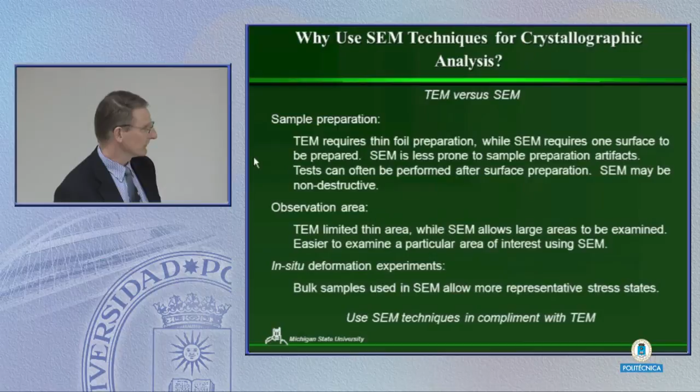With a bulk sample in SEM, we have a very good idea of what the bulk state of stress is, and we can relate that more directly with what's going on in the material. So hopefully we'll see some of those things as we go on. But on the other hand, SEM is not going to solve all the problems. We do have to use it in complement to TEM, and sometimes we're just stuck having to do TEM.

So when I talk about these sort of techniques, some of these will be familiar to you, and I think some will be new. Electron backscatter diffraction patterns have become very common in the last 20 years. We use them very extensively. When I started doing them, it would take 30 minutes to determine one orientation. Now with fully automated systems, we can get 500 orientations a second. So you can just get extreme amounts of data very quickly using it.

It's very useful for orientation determination. Has significant but not perfect applications in phase identification. What we focus on, and I'll talk a lot about today for some different reasons, are electron channeling patterns, and they've been around for a very long time. And sort of a subset of those are selected area channeling patterns. They allow us to determine the orientation perhaps more accurately or in a different configuration than you do with electron backscatter diffraction. They can also be used for phase identification, but we're not going to be doing that.

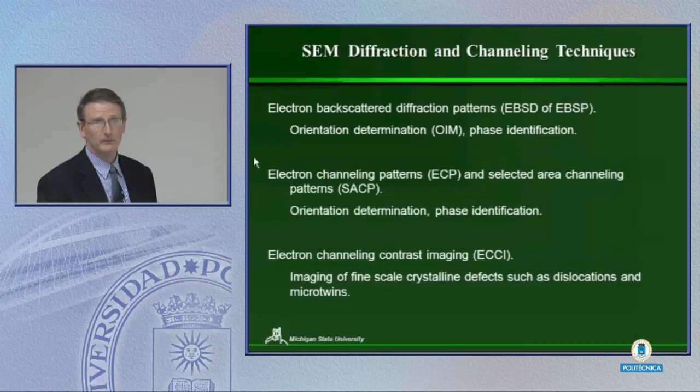And then really the thing that is somewhat unique is this idea of electron channeling contrast imaging, the idea that we can image fine-scale defects such as dislocations and microtwins in SEM, something that a lot of people haven't thought about doing in the past.

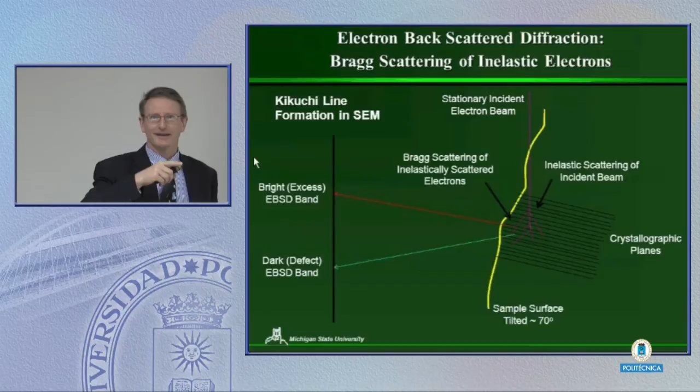So very briefly, can we see that well enough? That's pretty dark, and I apologize. I don't know if it helps if we turn off the lights in the room. Will that hurt you? Oh, we can't do that. That's... Okay. Yeah, there are actually very few dark lines on these slides, so hopefully we'll be okay.

Whoops, sorry. So the idea with electron backscatter diffraction is we have a sample tilted to a fairly large angle. We have an incident stationary electron beam. We get inelastic scattering in the sample. And those inelastically scattered electrons diffract to form Kikuchi lines that we detect on some sort of a screen.

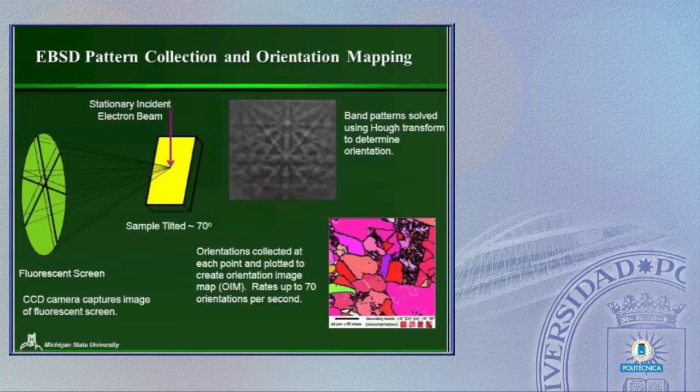And so the idea is you have a sample, again, that's tilted. We focus the spot on a given area. We collect these on a fluorescent screen, which then is recorded with the CCD camera. And we get patterns like this, which we can then use a Hough transform to determine the orientation. And so we can do maps like this, and actually this is not accurate now. This is a few years old. This is rates up to 70 orientations per second. This is more like about 500 orientations per second if everything is now working correctly.

But more what I'm going to focus on is this idea of electron channeling. With electron channeling, what we have is a situation that simply, as the electron beam orientation changes, or if the electron beam orientation remains the same but the crystal orientation changes, the backscattered intensity is going to change. And so there's a number of different ways that can be used to give us information about our sample.

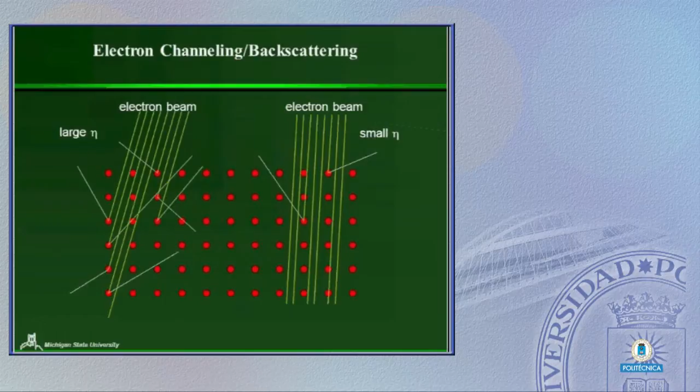If we take a single crystal of silicon, so now the orientation remains the same, but we look at that at very low magnification, the orientation of the beam changes as we image a sample, and that's effectively what happens in an SEM at very low magnification. We get a beam raster where the beam orientation changes. We'll get a series of lines that is indicative of the crystallography of the sample.

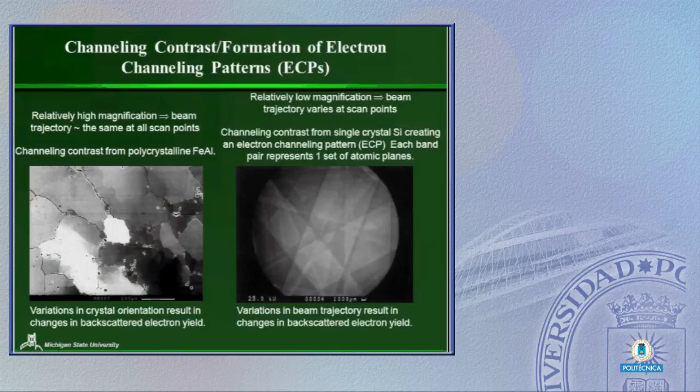And each one of these bands here is going to represent a set of crystallographic planes in the sample. So from this, we could determine the orientation of the sample. But in this format, this is not very useful for us because we're really limited to using this on very

And we typically don't use these necessarily for trying to just in general find orientations, but we want to be able to use these in the way you would use a selected area diffraction pattern in TEM in order for us to set up specific imaging conditions. And so that's quite useful for us.

There are some problems with this. Just in terms of the general sense of a scanning electron microscope, what you can do with this. First of all, a lot of SEMs are incapable of doing this. They used to be offered as a fairly standard option on SEMs, but it is much less common these days because EBSD has become so widely used.

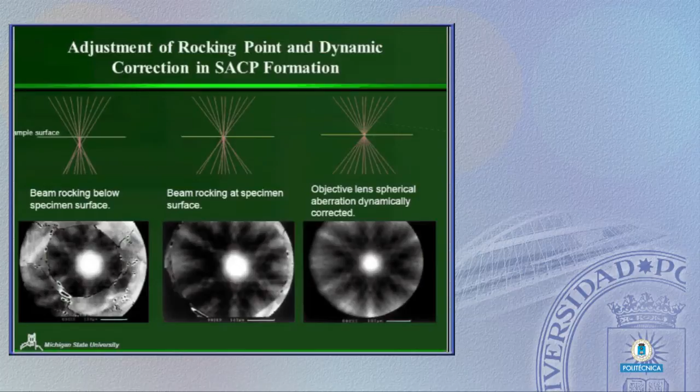Okay. So to compare those a little bit more, EBSD has spatial resolution certainly less than 1 micron. Some people will say tens of nanometers. It really all depends on how you're defining your backscattered electron interaction volume and how that is as a function of direction in your tilted sample. It has a fairly complex interaction volume.

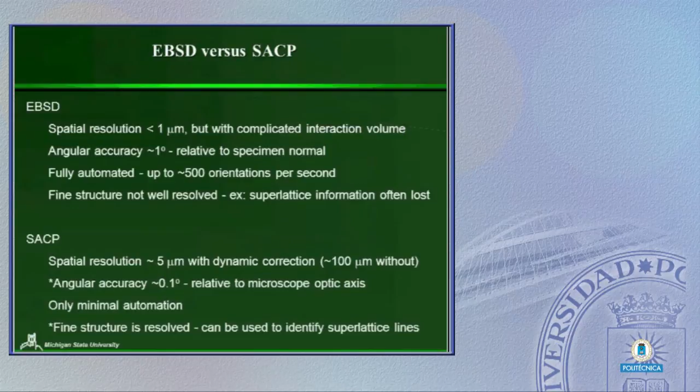With selected area channeling patterns, the best we can do is maybe about 5 microns. So the spatial resolution is not nearly as good. If we don't have dynamic correction, it's going to be even worse, about 100 microns, which really starts limiting this approach. But the angular accuracy relative to the optic axis is quite high, about 1/10 of a degree, maybe a little bit better. Only minimum automation, which my students don't like because it makes them work hard. And we do get fine structure resolved, which I'll give an example of, how that can be very useful for us.

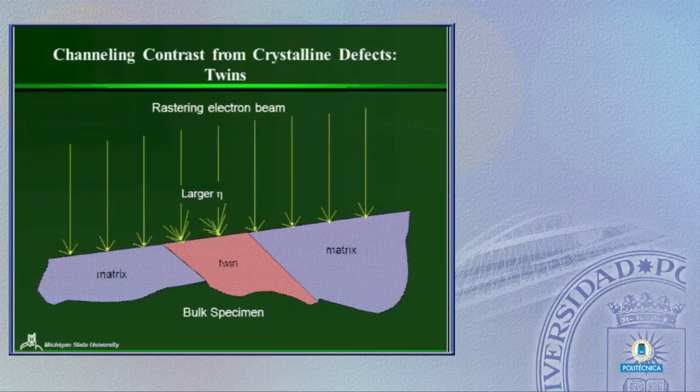So if we look at the sorts of things we can do, if we could see contrast from different orientations in a polycrystal, we could certainly see contrast from different orientations associated with twins. As we move across a twin, when the orientation changes, we're going to get a change in that backscattered yield, which is going to reveal the twin. And we can actually do that with pretty good resolution.

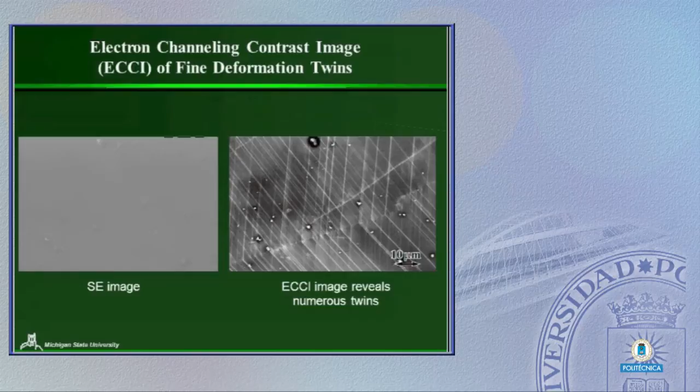This is a secondary electron image of deformed TiAl, and this shows a twin boundary, an annealing twin boundary, and these fine lines are deformation twins. Those are very, very small, in some cases on the order of tens to maybe hundreds of nanometers across, so they're very fine twins that we can resolve very easily in the SEM if we set up our imaging conditions correctly.

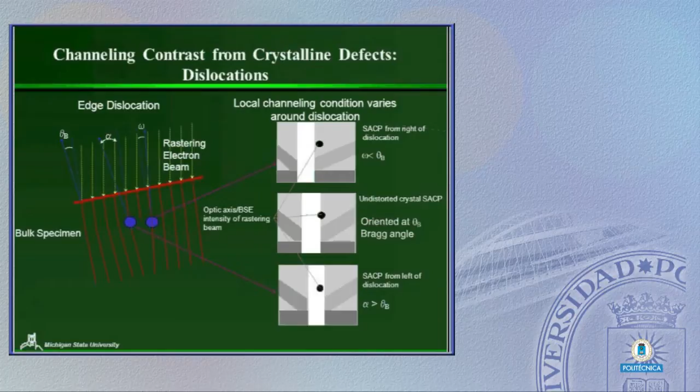If we want to see a dislocation, imagine this as a dislocation here. As we raster the beam across the sample, locally the orientation is going to change. We can imagine the channeling pattern near that dislocation; we can't measure that, but the center of those channeling patterns will represent the local backscattered yield, given by the intensity on that pattern at that given orientation. And because the pattern shifts as we move across the sample, we get changes in intensity as the beam moves across that dislocation line.

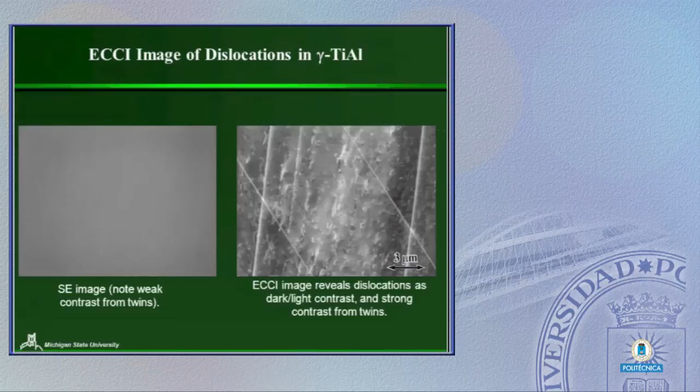Here's a secondary electron image of a very flat polished surface. But when we image it under the right channeling conditions, with the orientation set up properly, we can see the dislocations in the substructure fairly clearly. Here's a deformation twin, and you can see it peters out here. These dislocations right through here are the dislocations at the leading edge of that twin. So we can resolve them reasonably well, maybe not as good as TEM, but not bad.

Now this is kind of a noisy image, but people look at these things and say the dislocations look a little bit different than they do in TEM. Well, you might expect them to, because we have a bulk sample, and we're only really looking at the dislocations that are close to the surface.

In fact, theoretical work was done in Peter Hirsch's group many years ago on this, and shows that if we take the trace across a dislocation line, as you go deeper into the sample, the peak-to-background intensity is going to decrease. So the dislocations are going to be sharp where they exit the surface, and as they go deeper, they become noisier and eventually disappear. At first people say that's inconvenient, but the reality is that's a really good thing.

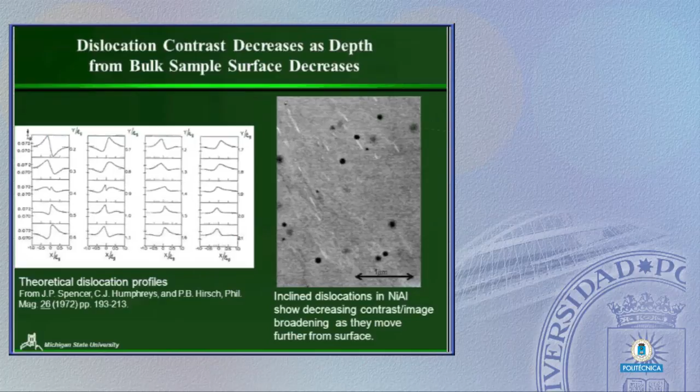Because if we were seeing all the dislocations through the depth of a bulk sample, we wouldn't be able to see anything. They would completely overlap and make it difficult to see. So this is a useful thing for us, but it also means that it's going to be a little bit more difficult for us to interpret the dislocations relative to how we're used to seeing them in TEM.

Well, how do we do this? Well, it's a fairly straightforward situation. We use a field emission gun SEM. We use a typical backscattered electron detector, pole piece mounted. On some of our microscopes, we've gone to retractable detectors because we want to be able to get it out of the way at times.

What we do, and I'll discuss a little bit more, is we generally use the specimen pretty much perpendicular to the incoming electron beam. We can tilt it about plus or minus 30 degrees and still be able to use this fairly usefully. But this is a different configuration than a couple of other people use. The field emission gun, because it's a thermal gun, gives us a pretty good beam current, and that's been a big advantage to us. We have a beam divergence of about 8 milliradians.

We work at typical SEM kind of working distances, and that makes our life really nice, because what we're able to do is use various deformation stages, things like that, that would be much more difficult to do if we were in a high tilt configuration, and quite frankly, impossible to do if we were doing this in a TEM.

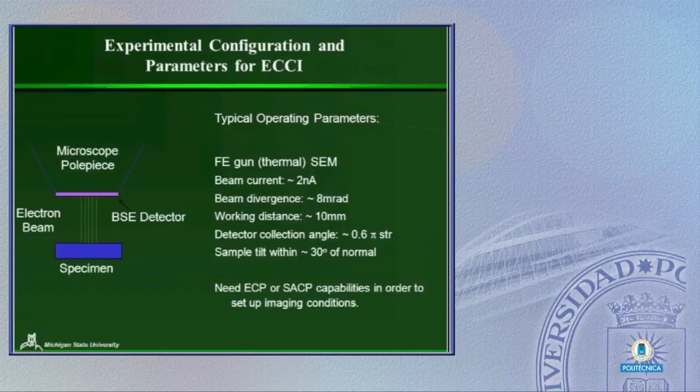This typical backscatter detector with these working distances gives us a fairly large detector collection angle, which is very useful for us because it gives us a lot more electrons on the detector, which really makes life easy. And one of the critical things for us is generally you're going to need to be able to collect these channeling patterns in order to set up the proper imaging conditions.

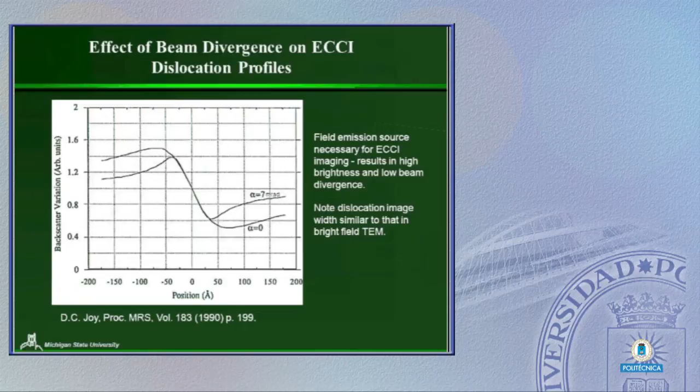The other thing worth noting on here, if you look at these sort of peak to background positions, the widths of the dislocation lines are similar to what you'd see in bright field TEM imaging. That's about as good as we're going to do. We can't set up anything like a weak beam condition like you get in a typical TEM, because here we're really limited by the probe size in terms of our resolution, rather than some of the other things associated with weak beam microscopy.

How do we set this up? Well, in many ways, this is the same thing as you would do in a TEM. In TEM, you would go to diffraction mode, you would tilt your sample to a 2-beam condition, you'd adjust your deviation parameter by moving your Kikuchi lines relative to the positions of your diffracted beams, and then you'd switch back to imaging mode.

Well, what we do here is we go to diffraction mode, we tilt to a 2-beam condition, we increase the magnification of that pattern, and we put the center of our pattern right on the edge of one of these channeling bands. And the reason we do that is this is where we get the most dramatic change in contrast between the dislocations, bending the planes, and the background. And then we just switch back to typical imaging mode. So here we're rocking the beam, and then here we're just rastering the beam back and forth across the sample. So in many ways, we can envision it a lot like what we do in diffraction contrast TEM.

One thing that's a little bit different, and those of you who are familiar with TEM realize that kinematical and dynamical theory both tell us that we want to use a deviation from the exact Bragg condition, and the dynamical theory says we have to do that with a positive deviation from the exact Bragg condition. It turns out with this, we actually want to set up our channeling condition exactly at the Bragg condition.

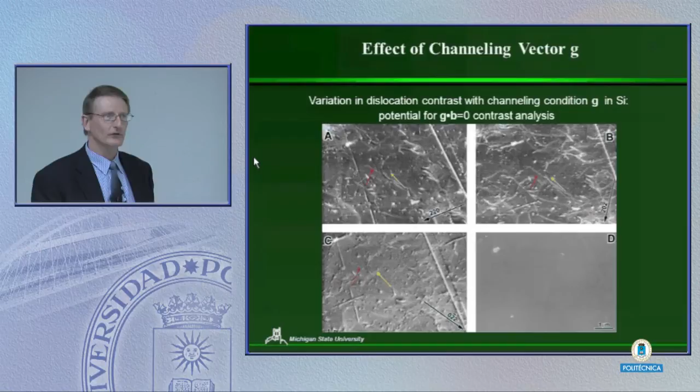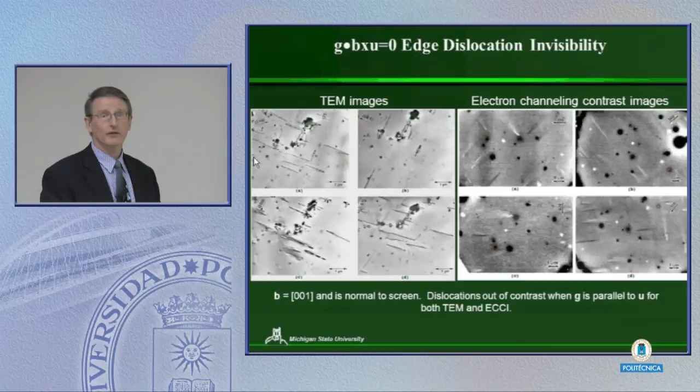And so that means that if we're very careful, and it's very tedious work, I'll be honest, my students don't like doing it, but we can determine things like Burgers vectors, and we can certainly determine things like line directions through trace analysis, rather than having to make a TEM foil to do those things. And again, sometimes that's a valuable thing to do.

I want to take a second to talk about how we do our sort of approach versus other people. A lot of people actually do this at a fairly high tilt configuration. And the reason is your backscattered yield increases as your tilt increases. And so typically EBSD is done at large angles, and that's the reason for doing them at large angles. That, and also you can fit a camera on the side of the chamber, and you can't put a camera right on top of the pole piece of your microscope. And so that certainly is an advantage because you'll get more signal at higher tilts.

But there's some disadvantages to that. First of all, if you're at high tilts, what tends to happen is your image gets squished together in one direction, and you have to focus differently as you raster across your sample. You can certainly do some corrections in a microscope to take care of some of those things, but it isn't necessarily an easy thing to do.

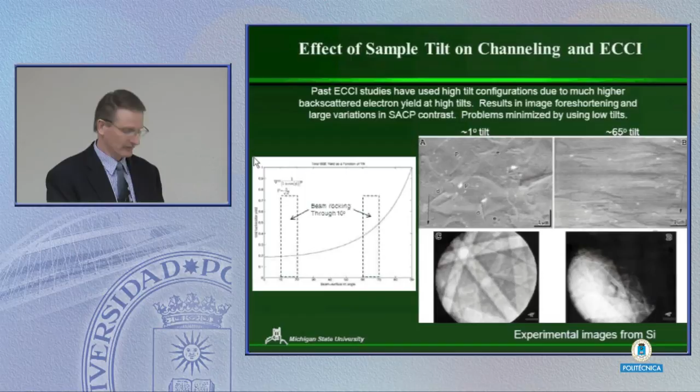The third thing is, if we have our sample tilted way over, it becomes much more difficult for us, for example, to use our in-situ deformation stages. They start knocking up against the pole piece of our microscope and things like that. So just working at a low tilt makes life a lot easier in a microscope. And so that's why we prefer to do it that way.

And so given that, this technique, electron channeling contrast imaging, is really very well suited for particularly in situ experiments. Now I'll show you some things from both in situ and ex situ experiments. The sort of thing that we can do is we can do both in situ or ex situ 4-point bending. The advantage here with 4-point bending is we can look at the tensile surface of the sample where the maximum stress is. And that really helps us work our way through some things.

We can also look at the sides of 4-point bend specimens in situ, and I'll show you some examples of this. And this is quite useful for us to get a general feel for how a crack is propagating. And finally, we can actually do some fairly high cycle fatigue in bending too, which again allows us to look, for example, at the tensile surface in a fatigue sample.

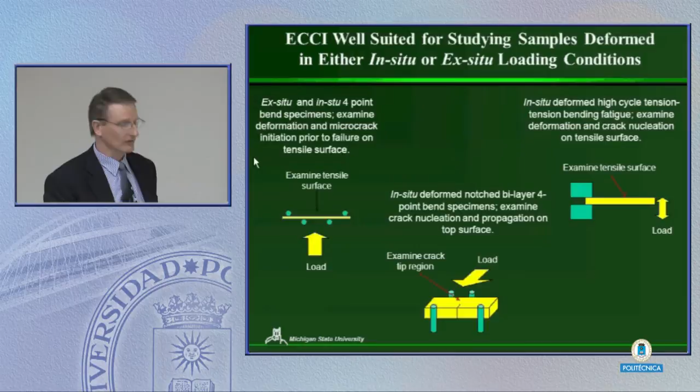We have a stage that will go at about 500 cycles per minute on our microscope. Obviously, we have to stop it to actually image, but we can do some fatigue testing, and then we can look at it, and we do some more fatigue testing and look at it, which is a useful thing for us. So what I'd like to do is now just go through a few examples of the sorts of things that we can do with this.

The first thing I want to show you is how we can look at crack tips. And this happens to be a nickel aluminum, which 20 years ago was a very exciting thing for people to look at. And we've been looking at this a little bit more and more over the years. What we've done is we deformed these with 4-point bending. In this particular case, I won't go into a lot of details, but I want to show you really the capabilities of the technique.

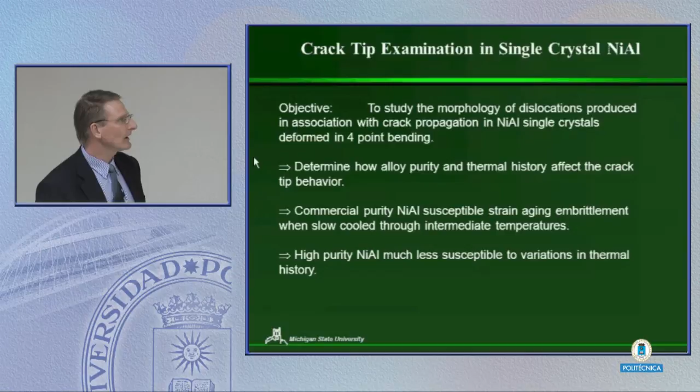We can determine how alloy purity and thermal history are affecting the crack tip behavior and the crack propagation. The reason we're looking at this is commercial purity nickel aluminum is susceptible to strain aging embrittlement. It becomes essentially a zero fracture toughness material if it is cooled the wrong way. High purity nickel aluminum is much less susceptible to these variations in thermal history.

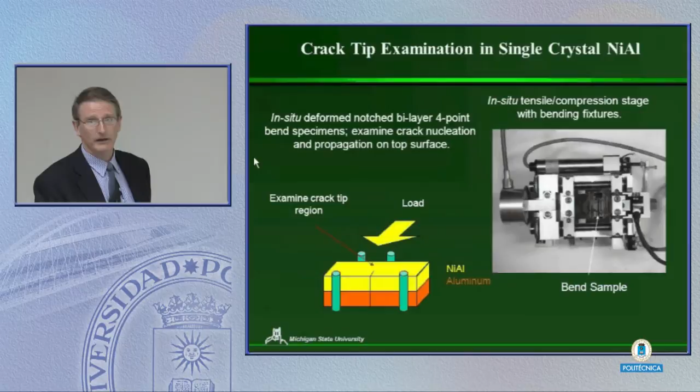And so what we're doing is we're taking a sample like this. The nickel aluminum still is very brittle, so we actually bond it to an aluminum substrate, really just to increase the toughness a little bit. And we take the sample and we put it in our deformation stage here, and you can see it right there, maybe, okay? And all we're doing then is we're deforming this, and we're looking at how the crack propagates out of this notch here.

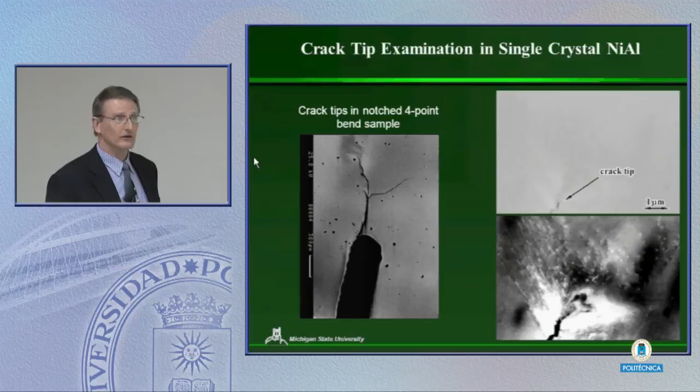Certainly as we get closer to the crack tip, the number of dislocations increases dramatically. That is partly the reason we get all this blooming here. Also, as the beam comes very close to the edge of the sample, some more backscattered electrons leak out the side, which gives us increased intensity. But the critical thing is really what's occurring out here in terms of being able to directly measure that plastic deformation field out in front of a crack.

The other thing, though, is because we have a bulk sample, instead of just looking at the crack, we can look anywhere along that previous crack. And so we get a feel for how big the crack tip was as it propagated. Here we can see in the slow-cooled commercially pure alloy, there's just a couple of dislocations along there.

And you can see that really it's a very flat fracture. In the same high purity material, slow-cooled, we can see it's a much more tortuous path. I think there's an indication of little bits of plasticity right along there. But we can also see dislocation slip bands along here. And we can see that those on this side go out to about here, which gives us a feel for how big that plastic zone was as the crack was dynamically propagating.

Now there's maybe some relaxation after the load is released and everything, but what we've seen in general is the crack tips, or I should say the plastic zone, ends up being much larger when the crack actually arrests. So it runs out there, and when it slows down, we seem to get a little bit larger plastic field.

The other thing that's interesting to note is how the dislocations are significantly different on either side of the crack. And we haven't characterized these fully, but certainly these dislocations are more or less end-on, so they look like points. Whereas these dislocations here are lying in the plane of the sample, and certainly aren't lined up in these same sorts of slip bands along here.

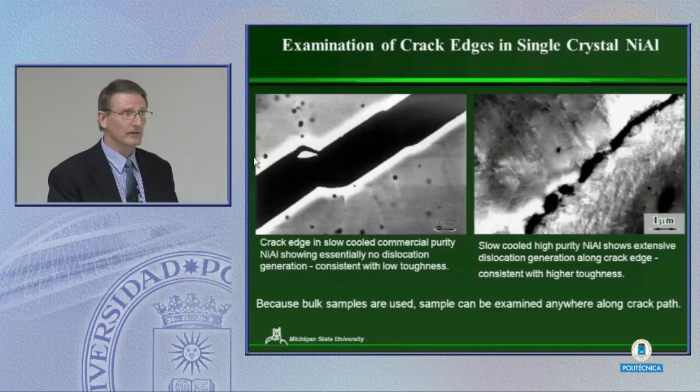And so I think we have a tendency when we think about crack tips to think about the dislocations being pushed out in a symmetrical way in front of the crack tip. But the reality is that doesn't need to be the case. And if you really think about it, it probably isn't expected to be the case. And so we can certainly see things like that.

Okay, and then I can talk a little bit more detail about TiAl. This is just a gamma alloy. And we've spent quite a bit of time talking about deformation transfer in this alloy. And what we're trying to do is really understand the processes of what happens at a grain boundary in terms of if we have a dislocation pile up or a twin piling up at a grain boundary, how does that transfer deformation into the next grain?

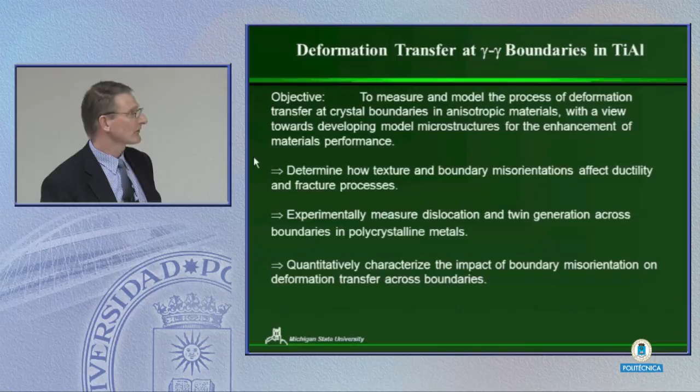And are there some grain boundaries where that happens easily? Are there other grain boundaries where that is more difficult? And particularly, are there some grain boundaries that are susceptible to damaging through this process? And so, in a broad sense, we're trying to understand how texture and boundary misorientations affect the ductility and fracture process. And we're trying to experimentally measure how dislocation and twin generation occurs in these polycrystalline materials, and then quantitatively characterize the impact of this boundary misorientation on this deformation transfer.

So to give you a little feel, and I don't want to go into a lot of detail, there are some people here who do know about TiAl, okay? Others of you may not be that familiar with it. It's an FCC derivative structure, but as a result of how the planes order, we have super dislocations, ordinary dislocations, super dislocations, and deformation twins.

And the deformation twins are kind of unique in that they occur on the typical twinning plane in FCC, the {111} planes, but there's only one twinning direction. The other two twinning directions won't be active because they would be superlattice intrinsic stacking faults with much larger Burgers vectors.

And so we can get all these things going, but one of the tricky things in here, and one thing that EBSD struggles with, is because the c/a ratio is very close here, EBSD has a hard time distinguishing between the c direction and the a direction. But this leads to a large anisotropy in the plastic behavior, so we really need to know the difference between those two.

And we can do that by identifying where these superlattice bands are, which I've shown on this quadrant of a stereographic projection. So instead of having to deal with a simple stereographic triangle, which we would have to in FCC, we really have to worry about a much larger portion of the stereographic projection to give us all the information there.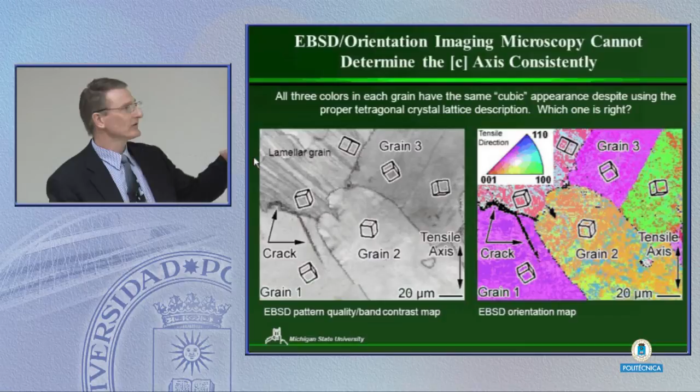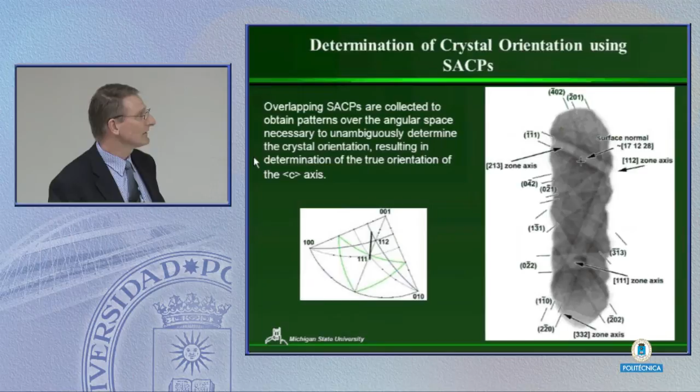And so what we found is if we use selected area channeling patterns, we can now go in there, and in particular, if we focus on this zone here, we can see in one of the three 220 bands, we can see the superlattice bands. Those superlattice bands then allow us to determine exactly where our orientation is within this stereographic quadrant.

Using that, then, we can take this pattern and run a little algorithm to correct these patterns to give us the true orientations. But then, not only do we know the true orientation of a particular grain, we can actually go back and see the large crystal rotations that are associated with the plastic deformation there. So this is something that EBSD really doesn't allow you to do. We have to supplement the EBSD with selected area channeling.

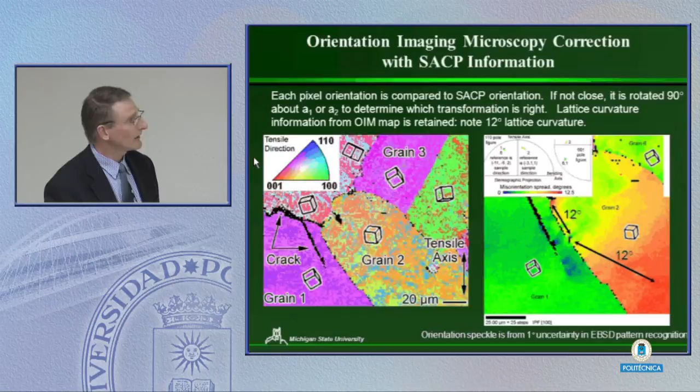Oh, okay. This is what my students do for me. I apologize for that. And I didn't know if I'd done the PDF, that wouldn't have happened on me.

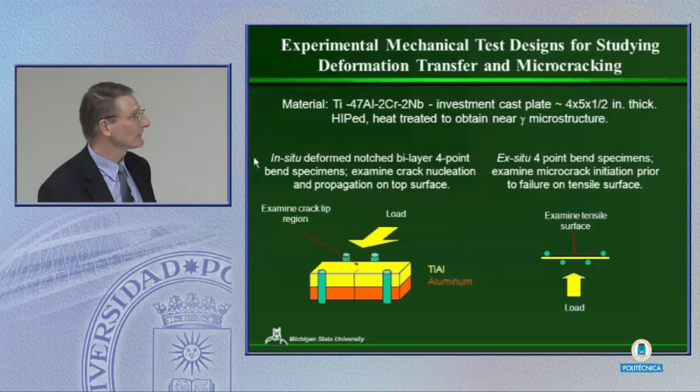Okay. And so then what we want to do is look at the same alloy, but we're going to look at the deformation behavior by looking at, first of all, this loading configuration, which gives us some hints of what's going on, and then looking at this loading condition, which is going to give us some statistical basis to make some conclusions.

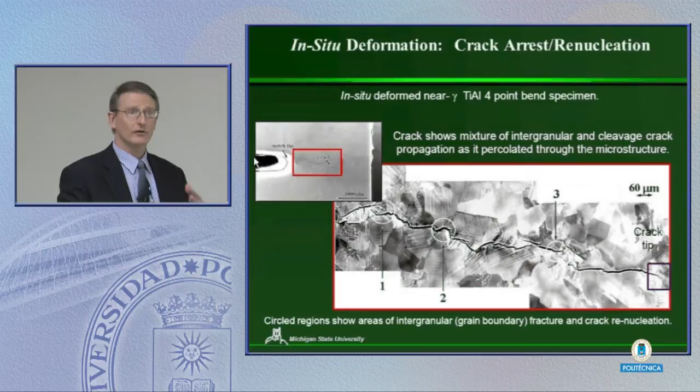If we look at a crack tip propagating out of one of these notches here, we can see some interesting things. As the crack propagates along, in general, it propagates by cleavage. But every now and then, we get some intergranular failure. And not only that, we see places like this where the crack propagated here and suddenly jumped onto a different plane. And we've seen that in a number of different places where we go from cleavage to intergranular. And sometimes it's renucleating on a different plane, or, I'm sorry, ahead of the crack.

Okay? So if I look at that crack tip in some more detail, we can see there's actually a lot of deformation going on here. We can see that there are lots of deformation twins. If we look closely here, we see kind of a rough, or what I would call mottled background, which suggests we have lots of dislocations there, and they're really difficult to resolve at this point.

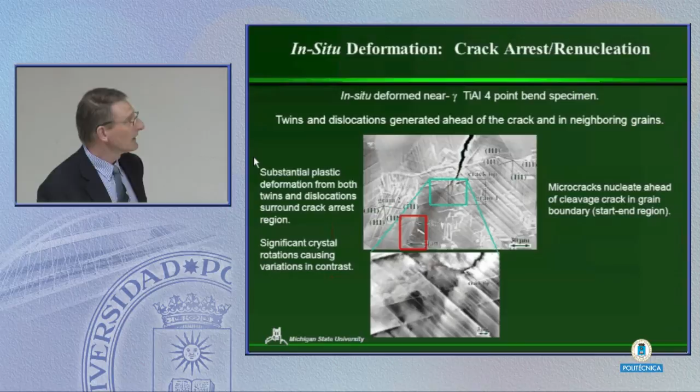Because we know the true orientations of all these grains, we can now do trace analysis to identify the specific planes. And with those specific planes, we know that there's a specific twin direction. So we know all the crystallographic details of these deformation twins. We know exactly what twins they are, rather than just saying we have a twin on a given plane. And that's going to become useful for us in just a second. What I want to do is concentrate on what's going on up in this little zone up here, which you'll see in the next slide.

So this zone is right here. And what we see is we have a bunch of twins here. And right at the tip of some of these twins, we have some very small microcracks that are nucleating. And at first blush, we looked at this and said, well, the twins are running into the boundary and that's creating a crack. But in fact, what's happening here, which I think is maybe even more interesting, these twins are actually nucleating here, and they end up terminating. You can see some here terminate as they move out from that boundary. So they nucleate here, but when these twins nucleate, they leave cracks behind, which is kind of interesting.

And as we deform it a little bit more, we find that actually that boundary right there opens up into a larger crack. And so this is a mechanism where deformation is blunting the cleavage crack, but that deformation is also renucleating cracks further ahead. Okay, so we tend to think of deformation as inhibiting fracture, but deformation may also nucleate fracture.

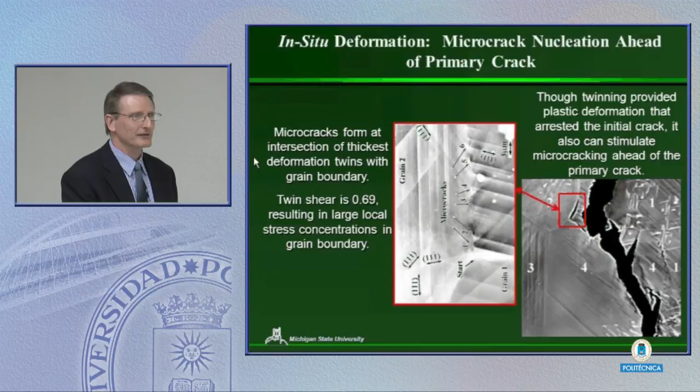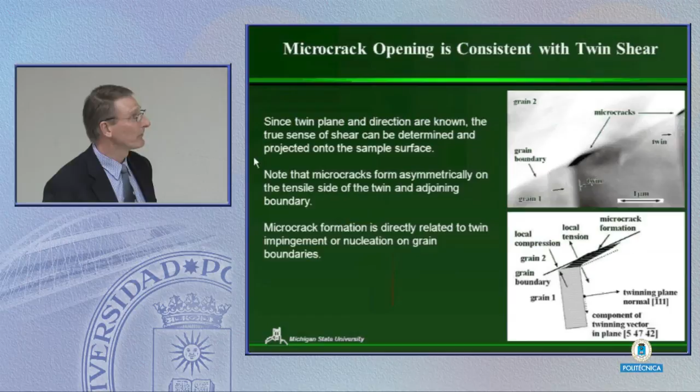Okay? And if we do the crystallographic analysis on this, again, we know the exact nature of those twins. We know twinning is unidirectional, and so we know we'll have a specific shear associated with a twin. And we find that these microcracks are located asymmetrically in relation to the twins. And that asymmetric nature is completely consistent with the shear that we expect from those twins as they open up. And so we're very confident that the microcracks form as a direct consequence of the twins nucleating at that boundary there.

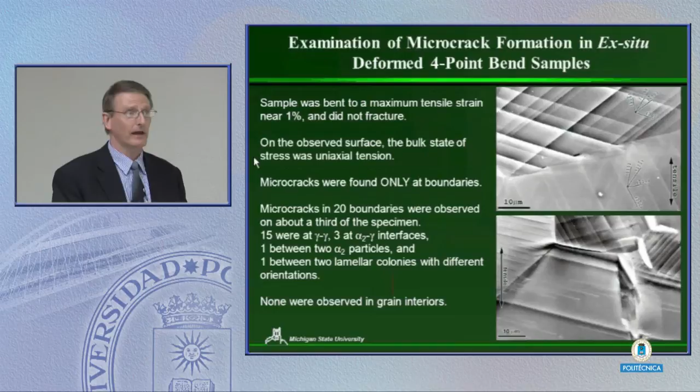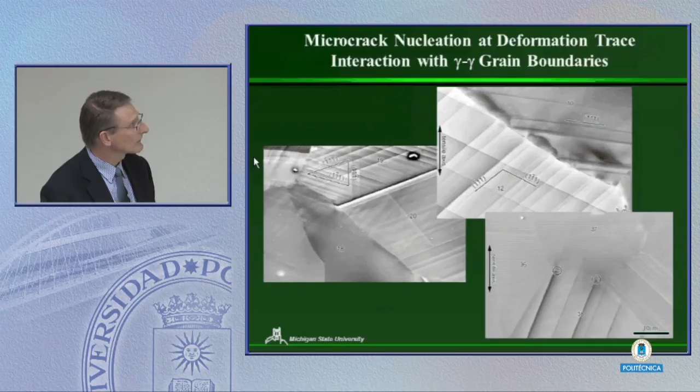We have twins interacting with the grain boundaries. Are there good grain boundaries and bad grain boundaries? And if we can understand what are the good grain boundaries and the bad grain boundaries, maybe we can do something in processing to eliminate the bad grain boundaries. So again, here are just some more examples of these. We can see these little tiny microcracks here, the microcracks there.

And at first we looked at this in terms of a slip compatibility factor that was developed by Luster and Morris a number of years ago in titanium aluminum, which really just says how well aligned are the deformation systems. What is the angle between the slip plane normals, and what is the angle between the slip directions? And it would make sense that if those are well aligned, slip transfer might be easy and you won't get deformation.

And so this factor here can range between 1, which says it's fully compatible, and -1, which would be fully compatible for dislocations, but it would be anti-compatible for twinning, because twins are unidirectional and you can't shear them in either direction. A value of 0 basically says that the deformation systems are at 90 degrees to each other. And so if we look at this in detail, we find that, and do I have this on the next slide now? Okay.

We find that in general if we have a high M prime, that's where we get evidence of transfer across boundaries. You maybe see a twin coming to a boundary and a dislocation pileup moving across, or a twin coming in and a twin propagating across. And so the factor works really quite well in terms of deformation transfer. The question is, if you get deformation transfer, do you get fracture or do you not get fracture? It's a little bit different question.

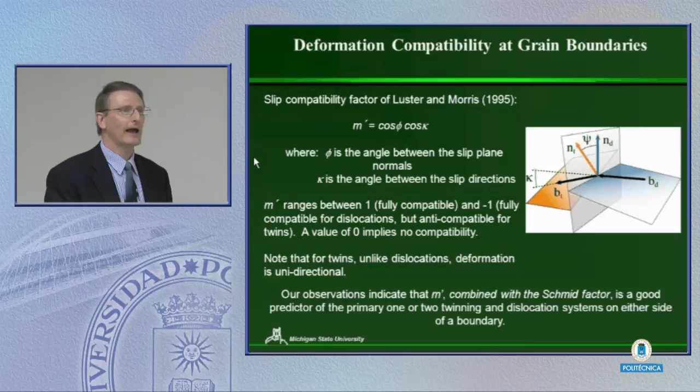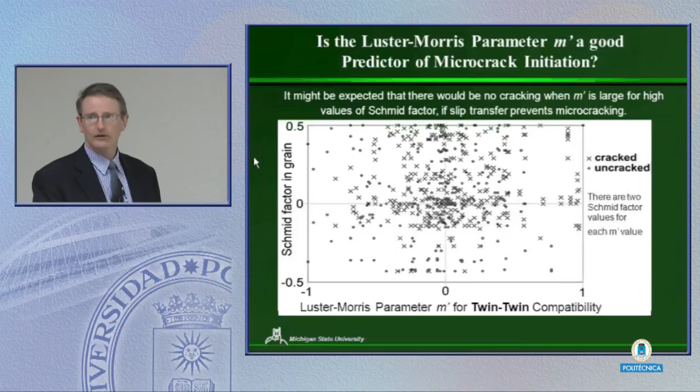And so we looked at that and we said, okay, what is the Schmid factor for a particular deformation twinning system? And what is this M prime? And this shows it for twin-twin compatibility, but we've looked at compatibility for different types of systems. And we plotted the cracked boundaries versus uncracked boundaries. And you can see that there is not a strong correlation. This factor says that even if you have good deformation compatibility, that does not predict whether or not you'll get fracture at the boundaries.

So what we did is we came up with a different factor based on work by Gibson and Forwood, who suggest that the twinning shear in this material tends to be accommodated by dislocation motion. And we put together this factor here that takes into account a lot of things. First of all, the Schmid factor of a given twin system. In other words, how likely is it for that twin system to be active? How is the Burgers vector associated with that related to the tensile direction?

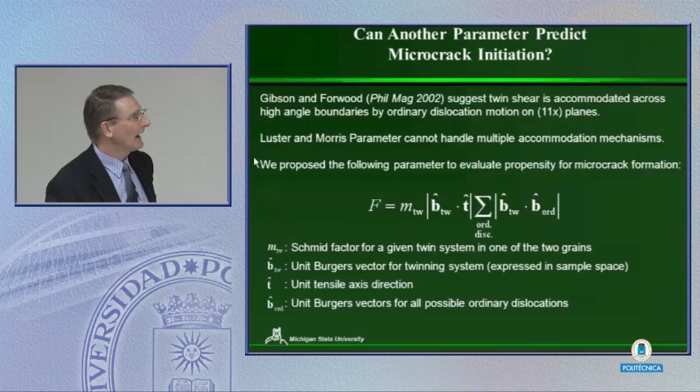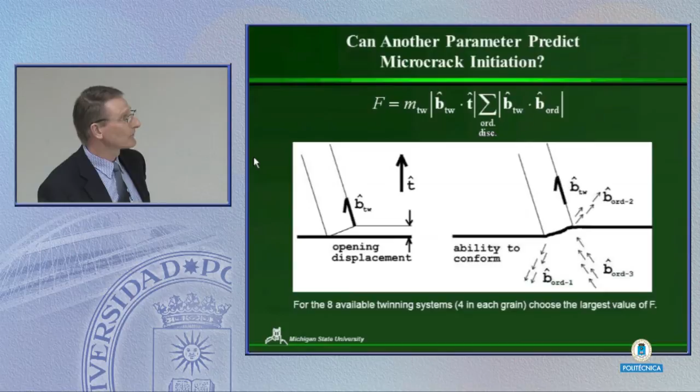Because if these are parallel with each other, it means that in general you're going to have more of an opening force on that boundary. And then how well can the twin shear be related to ordinary dislocation shear in the material? In other words, how well do these accommodate each other? So this kind of shows a model of this, where if we have cracking, we're going to have this situation. If we don't have cracking, we're going to have this situation, taking into account these various factors.

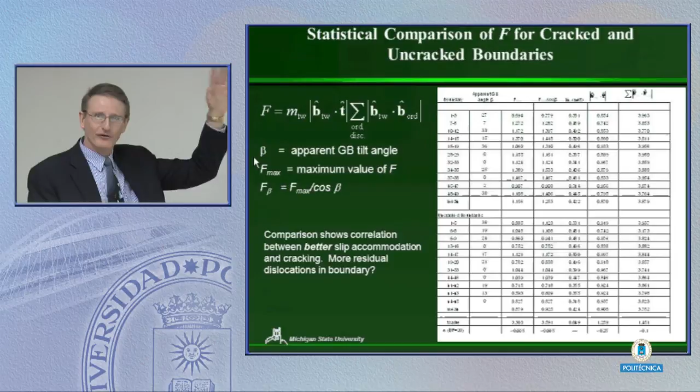So when we did that, we ended up looking at a couple of populations, a population of cracked boundaries and a population of uncracked boundaries. And I get a kick out of this because I've done TEM for 30 years, and nobody ever does statistical analysis using TEM. And why is that? Because how many people have ever made a TEM foil? Okay. But this allows us to do enough observations for us to get some relatively statistically relevant types of data.

And so what we've done here is we've used this factor and we've calculated it for the cracked boundaries and the uncracked boundaries. And we looked at those populations and did a Student t-test. Are you familiar with the t-test that compares two populations? And the question that it really asks is, is it actually one population or is it two populations? And so based on this factor, we do this t-test and we get the probability that these are actually the same population of 0.005, which suggests that these are actually distinct populations.

It doesn't mean we can necessarily predict what boundaries are going to be cracking, but we can also say if we take a collection of boundaries and we look at what their factors are, is it more likely one falls in one population or more likely it falls in the other population, which is getting us towards predictivity. The most interesting thing, though, is if we look at the individual factors associated with this, and we do the same sorts of tests, we see that the probability doesn't break out the same way.

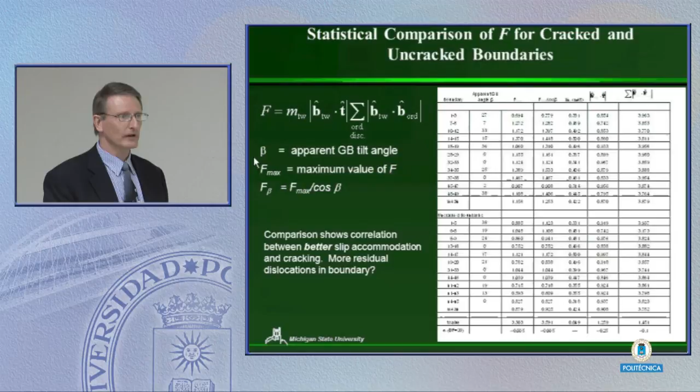So really what it says is that the boundary cracking we're seeing here is a function of multiple variables that are involved. And I guess it shouldn't be a surprise to anyone, but it also means that whenever you go to any material, you've really got to look at a lot of the details and the crystallography and how things interact to really understand why some boundaries may fracture and why some boundaries may not fracture. It's not a simple process.

Okay, so I want to show just a couple of other applications here, a little bit of work we've done in terms of device materials.

5 minutes? Okay, 5 minutes.

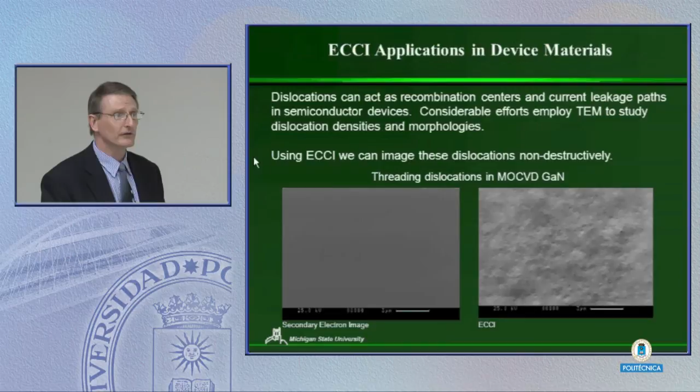I'm almost there. Okay, dislocation densities tend to be lower in device materials, which actually makes this technique maybe even a little bit easier to use. This is a MOCVD gallium nitride. These are threading dislocations. Again, here's a secondary electron image, extremely smooth surface, but we get lots of threading dislocations coming through. And so this gives you the ability really to map where the dislocations are quite easily. But what we want to do is see if we could apply this a little bit more broadly.

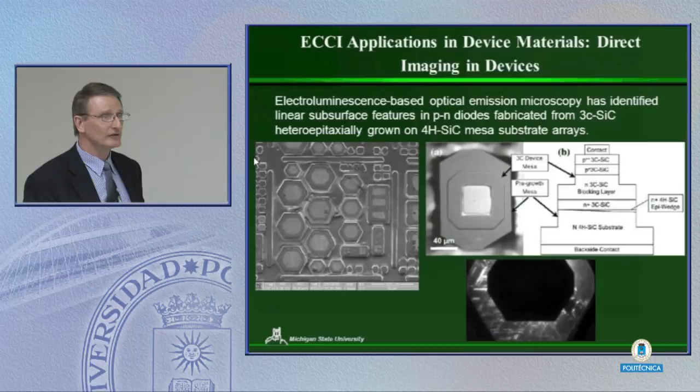And this is the stuff with Pirouz and Kevin Speer at Case Western, where they brought me this chip and they said, well, they've done some optical emission microscopy on this, and they see these lines and they think they're dislocations. And they said, can we see if these are really dislocations? And I said, well, we can see if we have lines that image like dislocations, and do they look that way? And at first blush, we thought this would be quite a challenge because it's a little bit hard to get an orientation from something like this, or so we thought.

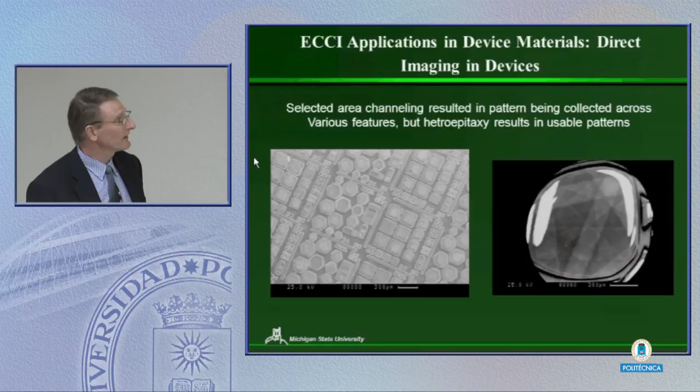But the reality is that this is a heteroepitaxial situation, and this is in exactly the same orientation as this, and this is in exactly the same orientation as this. And so it makes it actually pretty easy to get a channeling pattern. We certainly get an interference from the various structures on there, but we can get the pattern really without any difficulty. And looking at that, this is what they had looked at with their optical emission microscopy.

This is now in one of these areas here where we see exactly the same sorts of structures, obviously much better resolution. We did some tilting experiments and we were able to get some of the dislocations to go out of contrast, which helps confirm to us that these really are dislocations. We didn't do a full analysis, but it certainly appeared that these are 1/6<211> type partial stacking faults that are lying in the plane of these structures. And so we could look at it pretty easily.

Okay, so just as a summary, and then I don't know if I'll do the last thing or not. Some folks here might be interested in it.

Okay, sample preparation is certainly a lot easier for ECCI than it is for TEM. That should be a thin foil, not a thing foil. Only had that up there for a couple years. Okay. It only requires us to prepare one surface. It can be non-destructive. I can actually look at it and see if I have dislocations, then do the deformation and see how the dislocations actually appear. And so that makes it quite useful for us.

We can look at very large areas. You know, with a FIB, you can do some very nice site-selective TEM foil preparation these days. But you still have to take samples from a lot of different places. Here, I can look all over the place without actually damaging the sample. So there's some advantages there. So this makes it very conducive to in-situ experiments.

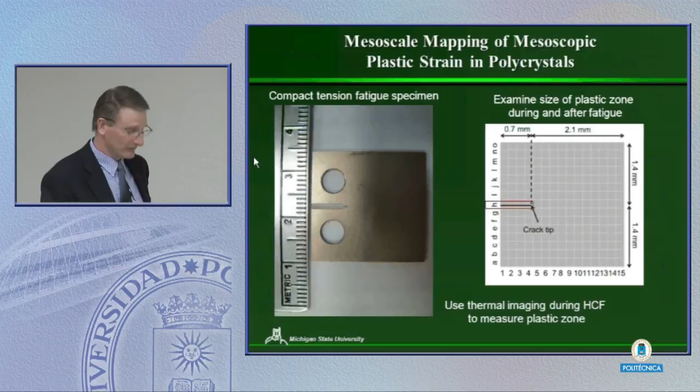And so this is very large. Compared to what we would typically look at with the things I do, this is a huge area. But they're very interested in what is the size of the plastic zone here, and that is something that historically has been very difficult to do. They're using thermal imaging during fatigue to actually measure that. They wanted to know if they were right. I said, well, maybe we're right. So what we do is we collect a whole bunch of backscattered images there. And that's really simple to do. Just go in there, have an undergraduate snap image after image.

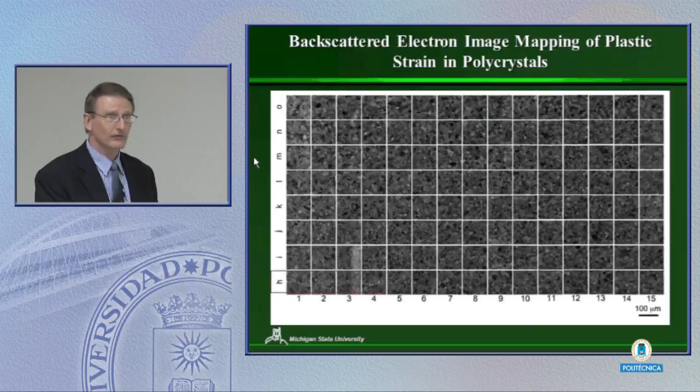But what happens is the images near the crack tip look different than the images far away. Because near the crack tip, there's more dislocations, there's more crystal rotations, and the channeling contrast is going to be different in those areas. So if you move far away, you can see the grain structure in these backscattered images fairly easily. But close to the crack tip, because of the crystal rotations, we get more channeling bands and things like that. It becomes harder to see those.

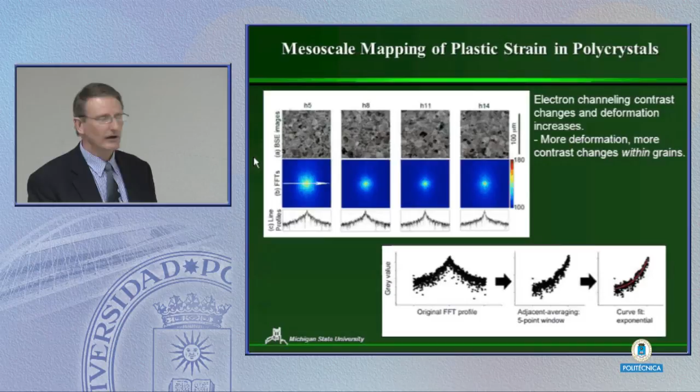And what we said is, if there's a change in this contrast, maybe what we can do is do a Fourier transform on that. And when we did that, it was very clear that the Fourier transform changed because the frequencies in the images were changing. And again, these are fairly low magnification images. That's 100 microns there. And if we take a trace across those, we can measure the full width at half peak. We do a bit of cleaning up to do that, which now gives us something that says the full width at half max is going to change as we deform the material. So can we quantify that?

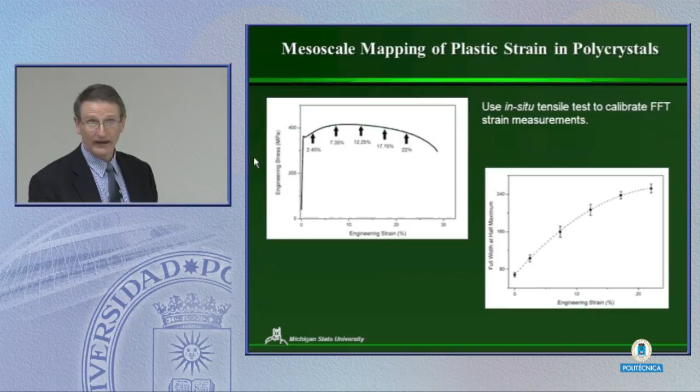Now, I'm a microscopist, and everyone keeps working smaller and smaller. But this is macroscopic. This is actually fairly easy to do. And like I said, I think maybe civil engineers appreciate this. When I show this to mechanical engineers, they get really excited because this is the scale they're interested in. And it was kind of amazing. As far as we could tell, no one had ever taken this kind of approach before. We recently published it in the Proceedings of the Royal Society, so they must have liked it.

I think that's your slide. Okay?

Thank you very much. I'm afraid today is a hard day for him. I have to take him to class. So you have... I have 2.5 hours of lecture today. Yeah, that's it. We work a lot here in Spain, I promise you. Every day, I know. Siesta, right? After that. Okay. Yeah, so we have time just for 2 very easy questions.